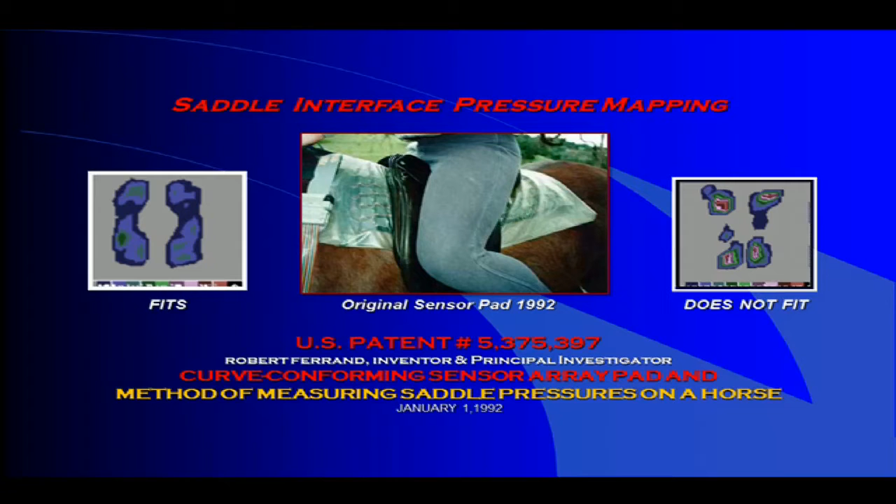By way of introduction, our company was founded 20 years ago by building the world's first computer saddle fitting system, which was a way to actually measure the pressures under the saddle. This is a computer pressure sensor pad that we originally developed for measuring pressures on humans in hospital beds. This technology permits us to actually see a color representation of the pressure on the horse's back.

Expert saddle fitters claim that you need to fit the saddle so it fits evenly on the horse's back. To test that theory, we have molded a piece of plastic into a mirror image of this horse's back. Since the plastic is clear, we can actually see that it fits this horse perfectly. So now what we're going to do is put the plastic to the test, to see if an even surface actually does what everybody says it does. We've got that with a little bit of padding for the horse.

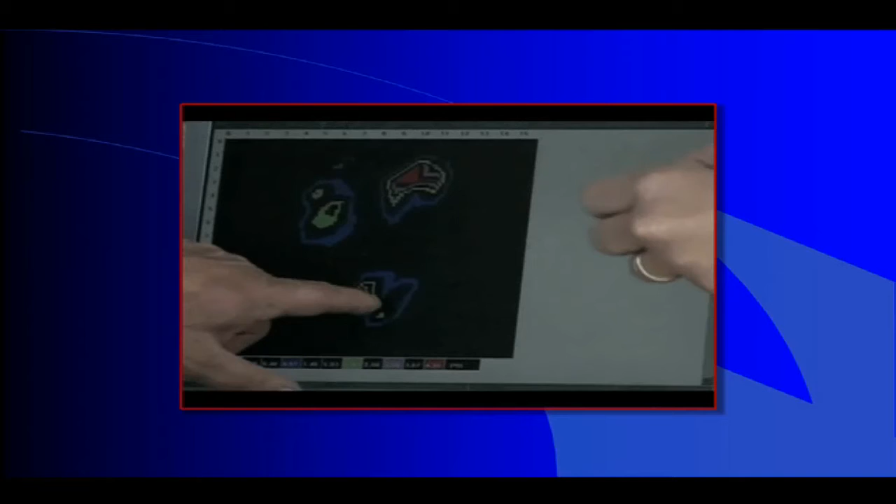Now you see what's happened here? You've got a space in the middle, and then you've got pressure top and bottom. That's called bridging—that's how you get the white hairs on the horse. But what's interesting is that was the one with equal distribution. So that's the issue: what you've been told for all these years is false. It doesn't matter if the saddle weight is evenly distributed, because when the rider gets in the saddle, it all changes.

The computer system revealed that very few saddles actually fit, and we quickly understood that the saddle industry had no way to determine the three-dimensional shape of the animal, much less the three-dimensional shape of the saddle.

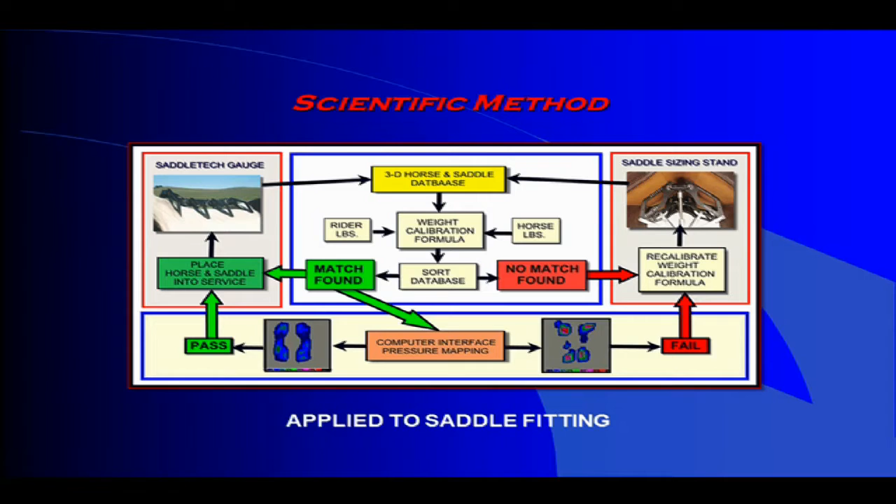So we invented the Saddletech gauge. These two animal and saddle measurement systems permitted us to apply the scientific method to saddle fitting.

Measure, hypothesis, predict, test, and validate. The three-dimensional measurement system then permitted us to develop a calibrated manufacturing process to make thermoplastic animal back protection devices.

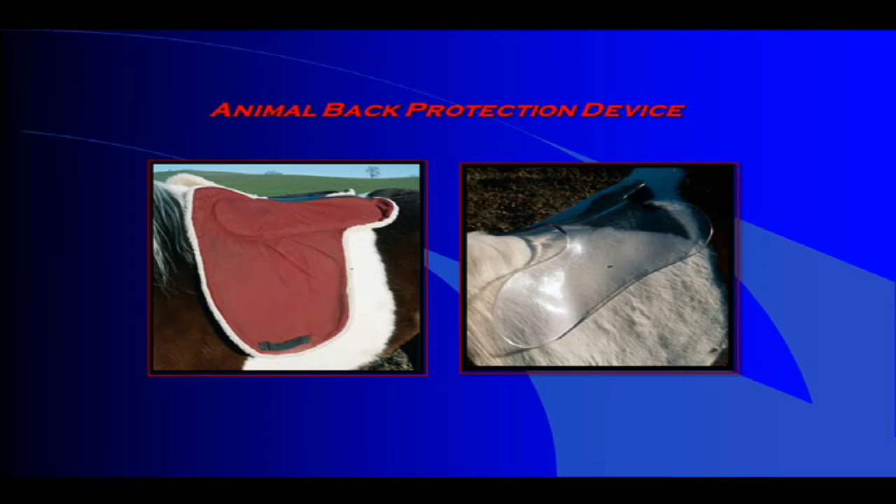The animal back protection device is basically a thermoplastic sheet draped over a calibrated adjustable jig, which itself is built on top of the Saddletech animal measurement gauge. This permits us to manufacture calibrated thermoplastic orthotics of any shape to correct for defective saddles.

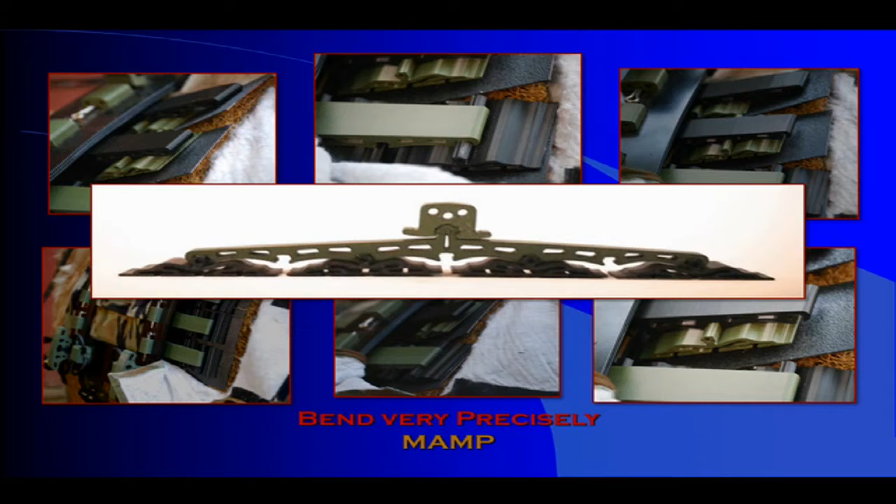Ironically, our newest product is a modular animal mobility platform that does not require measurement to fit the saddle, because we developed a beam that conforms to the shape of the animal's back. This is basically a plastic beam and leaf spring that can be made to bend very precisely, so that no measurement or fitting is required.

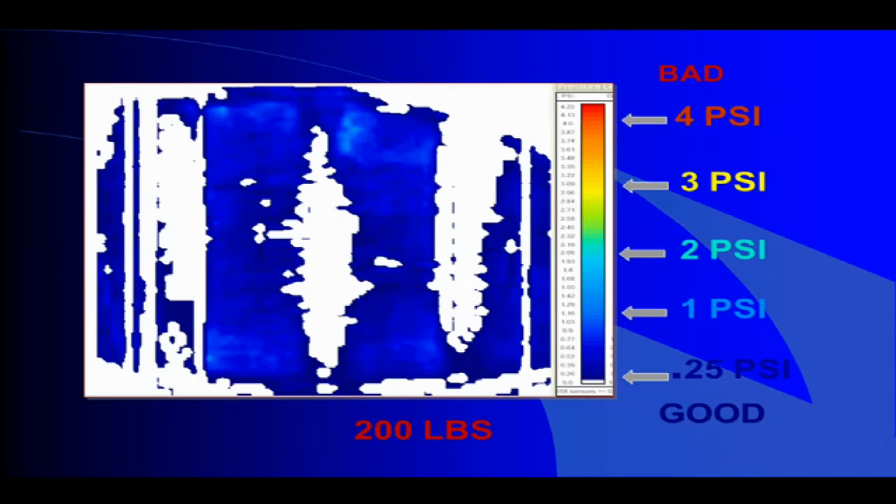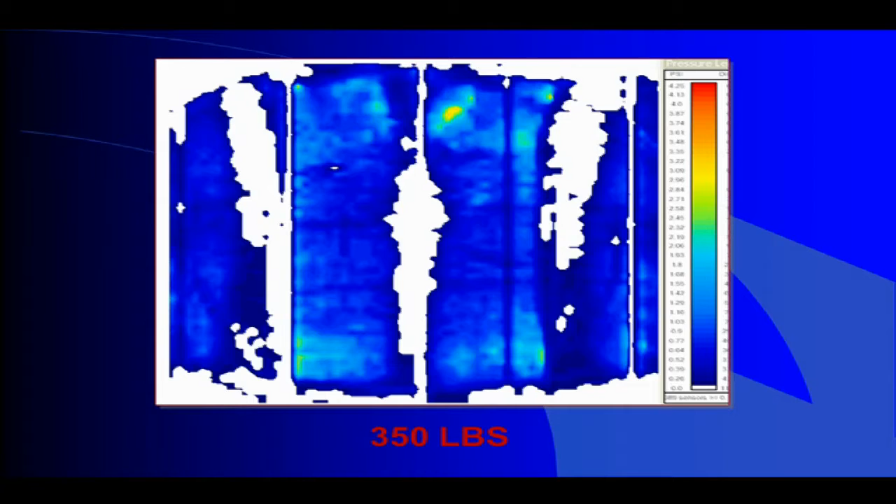This is plug-and-play technology. What is even more amazing is that we can actually prove that it works, loaded with 200 pounds, by employing the computer saddle interface pressure measurement system that we also invented. For the skeptics in the audience, this is the system with a 350-pound load. Now, this is just a prototype, so there is room for improvement, but it does make the point: at 350 pounds, it works pretty well.

We then put D-rings and cleats all over the place, so no knots were required. Then all sorts of different cargo can be loaded onto the pack frame: weapons, packs, water, ammo, with no fitting, no knots, or training required. Basically, we out-invented ourselves. So fasten your seatbelts, and here is the story of how we did it.

All forms of transportation are required in the military service.

Pack transportation, the means of transporting loads on the backs of pack animals, is of the greatest importance in campaign. The light Phillips pack saddle is used for the cavalry to transport machine guns, ammunition, rations, medical kits, and all other equipment required in the field.

The history of the MAMP pack saddle traces back to World War I, when the United States Army had a desperate need for a simple pack saddle that was easy to use, packed quickly, and could accompany the cavalry at all gaits. This challenge motivated the military to test nearly every pack saddle of the time, including many of the pack saddles that SOF currently employs. This research culminated with the Phillips pack saddle being adopted for the cavalry service in 1924.

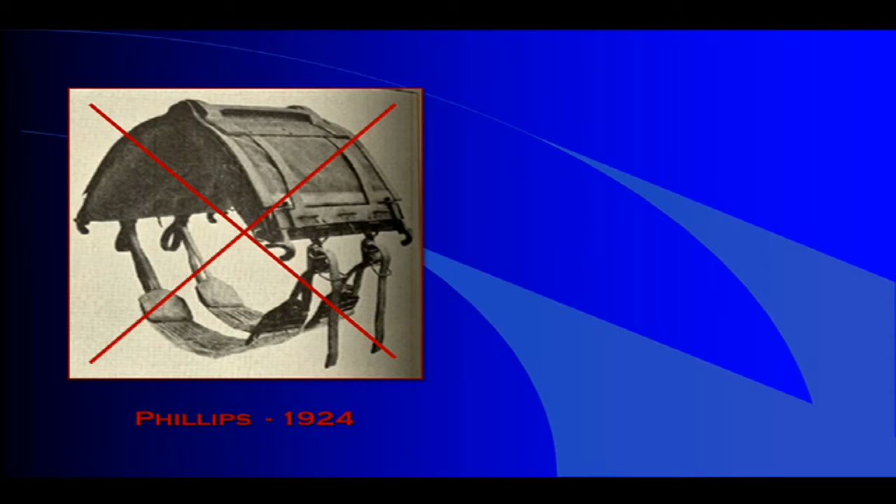Unfortunately, the Phillips pack saddle is no longer manufactured. Fortunately, the MAMP Modular Animal Mobility Platform has just been developed to replace the Phillips pack saddle and permits the tactics, techniques, and procedures developed by the Army 100 years ago to be reintegrated onto the modern battlefield with the proper equipment. The Modular Animal Mobility Platform is the proud successor to the Phillips pack saddle, offering all of the superior features of its predecessor.

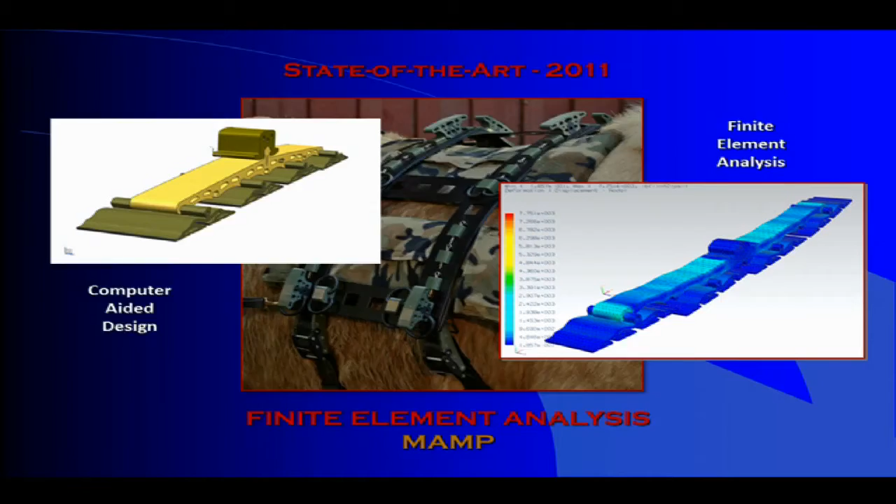However, what makes the MAMP pack saddle totally revolutionary is the use of computer-aided design and finite element analysis to create a calibrated load beam and curved leaf spring that self-adjusts to the animal and requires no measurement to be able to fit the saddle.

Now, by employing the computer interface pressure measurement instrument, one can validate that a 150-pound load actually exerts pressures that are below a half a pound per square inch. No wild guesswork here. This is the real deal.

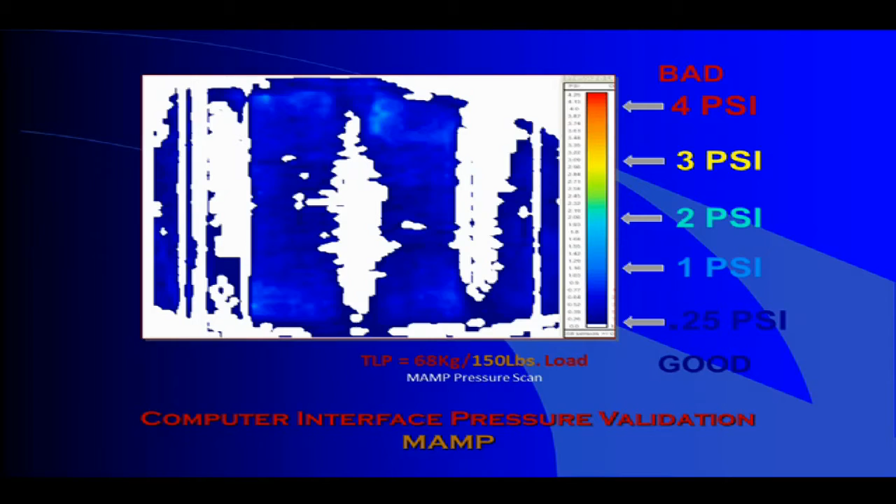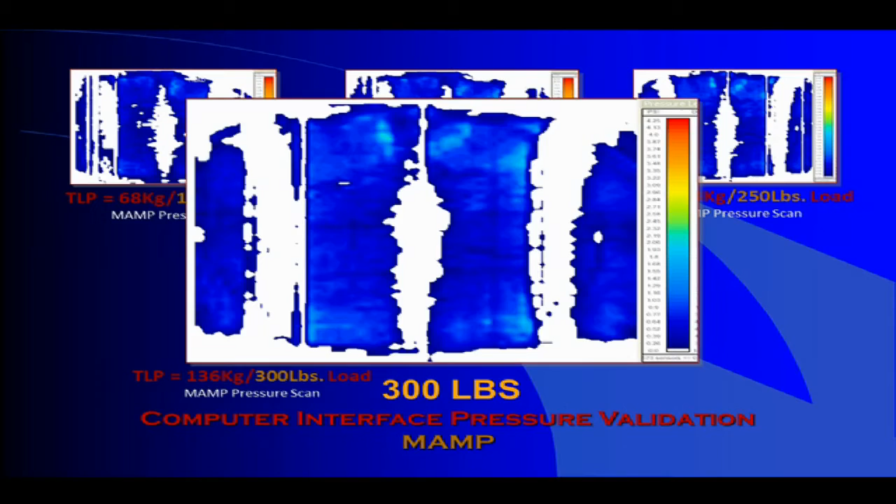Now, this is a series of saddle interface pressure measurements starting at 150 pounds. Now, 200 pounds, 250 pounds, 300 pounds, and finally 350 pounds.

Now, this is a prototype system and will improve with the next generation. However, that said, comparing the 150-pound load to even a load as high as 350 pounds does prove the point that the MAMP saddle still does distribute the pressure relatively evenly at more than double the load, which is well beyond the load that should ever be placed on any animal.

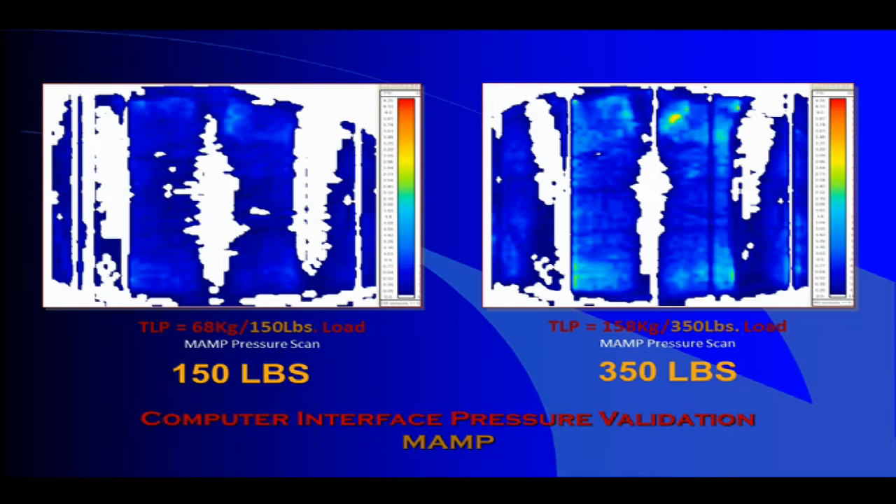Now, it is all well and good not to overload the animal. However, if we go back 100 years to the manual of pack transportation, sometimes in an emergency you have to overload the animal to save lives.

One of the significant features of the MAMP system is that it does not require any knots to be learned, because the pack saddle has cleats and D-rings all over the place.

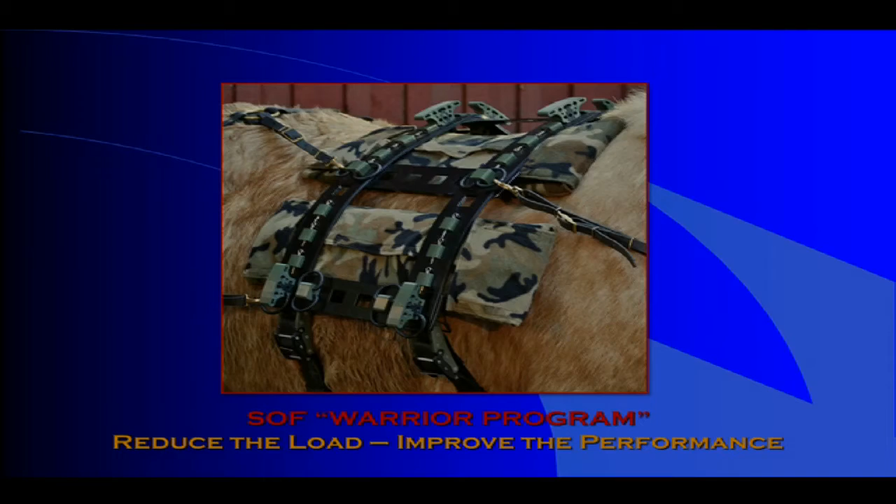The basic MAMP pack saddle has immediate utility for the SOF Warrior program to reduce the load and improve the performance of the operator, because the operator does not need to know how to fit the saddle to the animal, nor do they have to learn any knots. By shifting the pack load from the operator to the pack animal, the operator could save their strength for the mission.

The MAMP pack saddle could be precision dropped from any aircraft with supplies. The operator on the ground need only find any sort of pack animal and place the backpacks on the MAMP system and tie the packs to the saddle using the cleats. No knots required. A simple solution.

Another unique feature of the MAMP saddle is that it creates a solid base upon which a variety of different hangers and cargo systems can be employed by using a side support. The MAMP system even has a quick-release cinch.

SOF employs legacy design sawbucks and Decker saddles because they're the only saddles that are currently manufactured. The MAMP system can be converted to legacy sawbuck and Decker packing methods, affording all of the advantages of the MAMP pack frame, permitting packers who are familiar with the Decker and sawbuck loads to migrate to a more modern system, which is healthier for the animal.

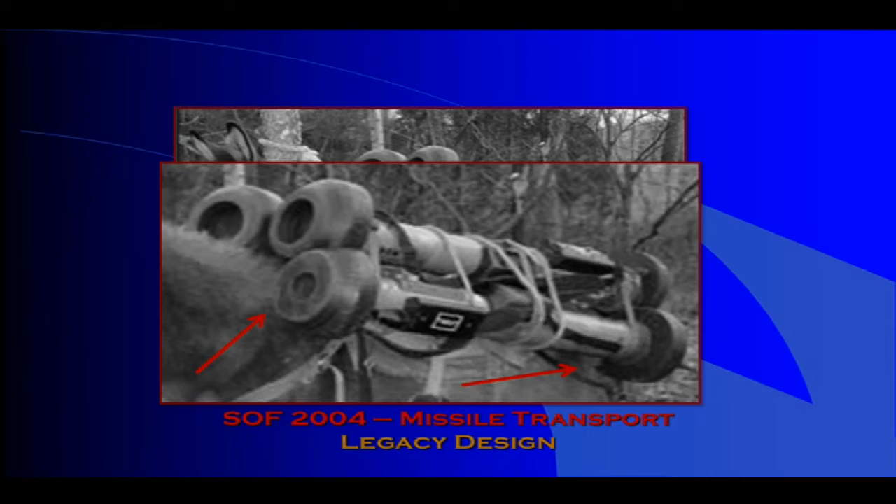Here is an example of a current SOF missile transport system right out of the latest 2004 field manual. This legacy design requires the use of ropes and knots and forces the animal to move slowly so that the missiles do not become loose. More significantly, because the missiles actually touch the animal in the front and back, there is a chance the animal could be injured and the mission aborted.

Backpacks, flatbeds, and missiles all can easily be packed without the use of knots.

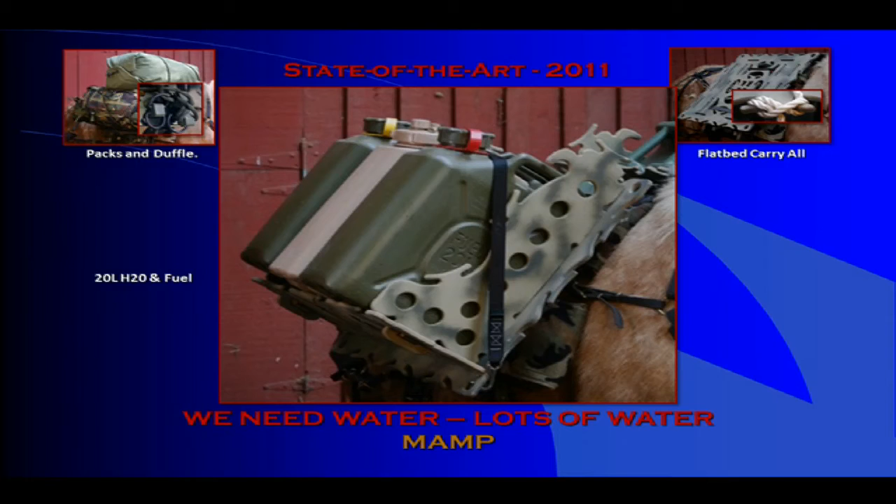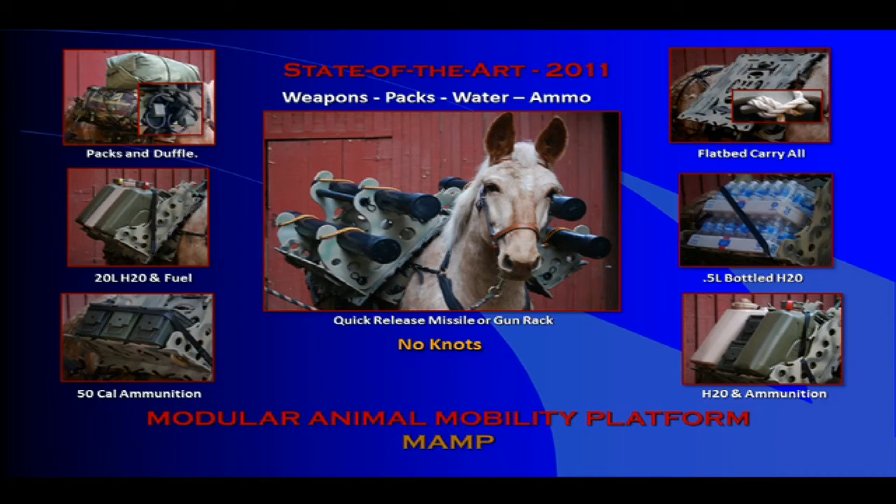The next important task is carrying water or fuel. The MAMP stake bed can carry water, either 20-liter jugs or many small half-liter water bottles, again without the use of knots. To feed the 50 caliber machine guns in the quick release rack, the MAMP system can also carry 100-round ammunition boxes. Even a combination of water, fuel, and ammunition can be carried with this system, because there are cleats conveniently placed all over the place.

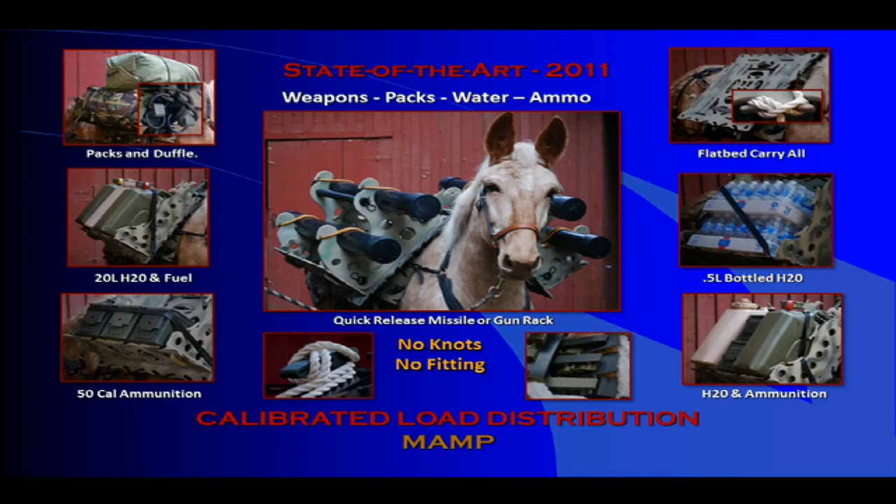The MAMP system is significantly different from all other pack saddles because no fitting is required, due to a revolutionary calibrated load beam and leaf spring array that self-adjusts to the shape of a wide variety of animal backs. This revolutionary design can be used virtually right out of the box, so no training is required, permitting any operator to reduce the load and improve performance by transferring the heavy load to the pack animal, saving their strength for the mission and providing a combat multiplier.

Now, here is the challenge. This is the 2004 Field Manual, Special Forces Use of Pack Animals. In Section 531, Fitting and Adjusting the Saddle, the manual correctly states improper adjustment may cause injury to the animal or may affect the time and distance the animal can carry its load. However, neither this field manual, its predecessor, nor any field manual the Army has released actually explains how to fit the saddle to the animal.

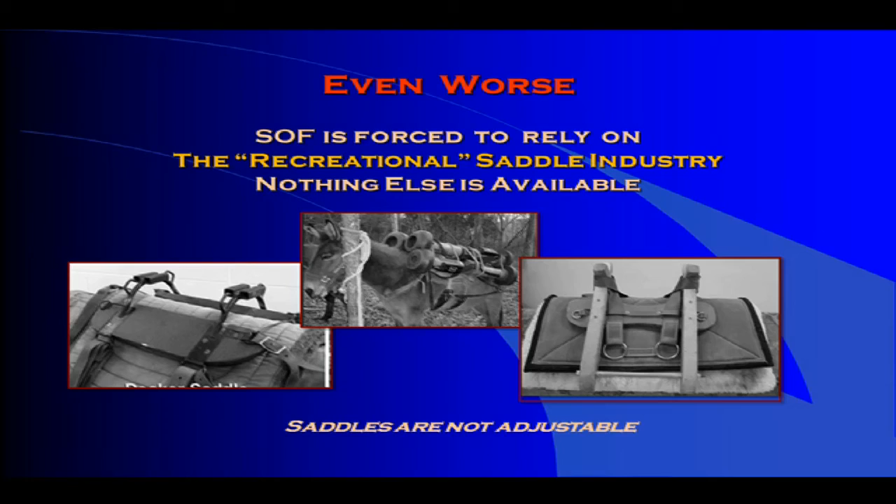This is because the military does not have any method of measurement to fit the saddle, and even if they did, most of the saddles SOF currently employs have limited adjustability or are not adjustable at all. Even worse, today SOF has to rely on the United States recreational saddle industry for pack saddles because nothing else is available. This is a mission-critical skill set with no solution. This is an unacceptable position: no method of animal and saddle measurement, and the saddles are not adjustable.

Let me tell you something. No matter how many planes and tanks and guns you pile up, no matter how many men you've got, it doesn't mean a thing unless the men get the stuff when they need it.

The idea for coming here for the pack animal training is there are areas in Afghanistan you can't reach by helicopter or by roadside for resupply. Helicopters have ceilings, soldiers' backs hurt a lot of times from carrying too heavy of loads, and so this is a great opportunity to move equipment and logistics to areas we couldn't normally reach.

Today, the United States military has battlefield supremacy on land, at sea, and in the air, with one exception: mountains and jungles. Whatever else he may be, Osama bin Laden is a horseman, and so are many al-Qaeda members. Bin Laden has proven that engaging special forces in mountainous terrain places the United States military at a technological disadvantage. The Modular Animal Mobility Platform will permit a shift in the balance of power back to the United States military in mountainous regions of the world where many terrorists seek refuge.

By permitting virtually any soldier to use any old pack animal and avail themselves of a combat multiplier, because no fitting, no knots, or training is required, anyone can move virtually anything, anywhere, anytime, by pack animal.